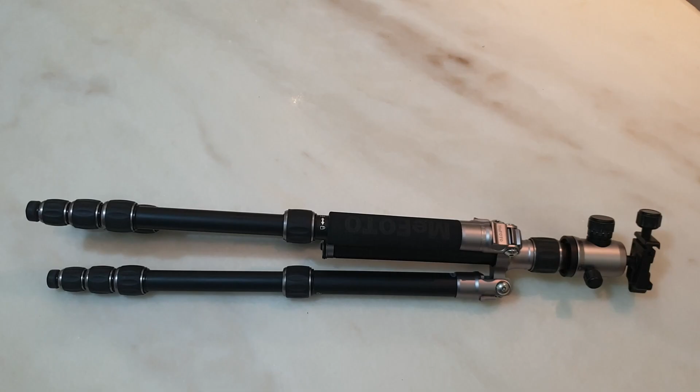So this is my tripod. And last time I'm using this like this to shoot all my overhead videos. As you can see, there's so many disadvantages of this. There's so many shadows appearing and it takes too much space on the table. And today we'll be addressing those issues by making an overhead video tripod attachment.

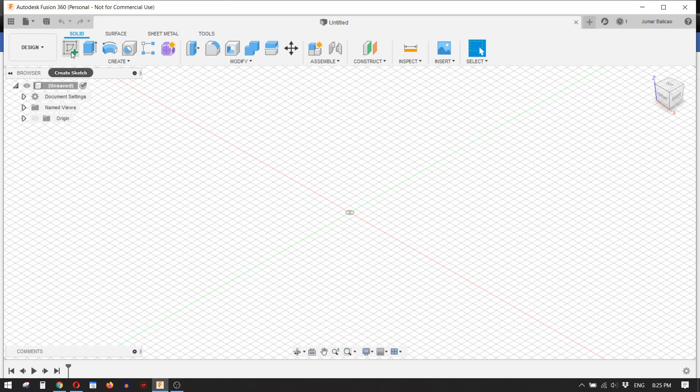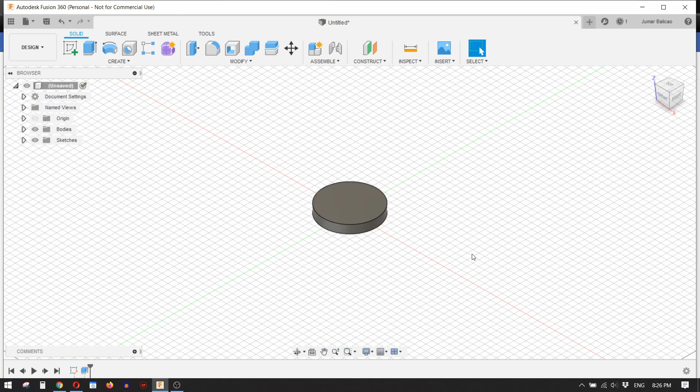So let's open Fusion 360 and we'll sketch a circle that is 45mm in diameter, and we need to extrude this to 7mm. Then we need to sketch again on top another circle that is about 40mm. Then we need to extrude this at about 50mm.

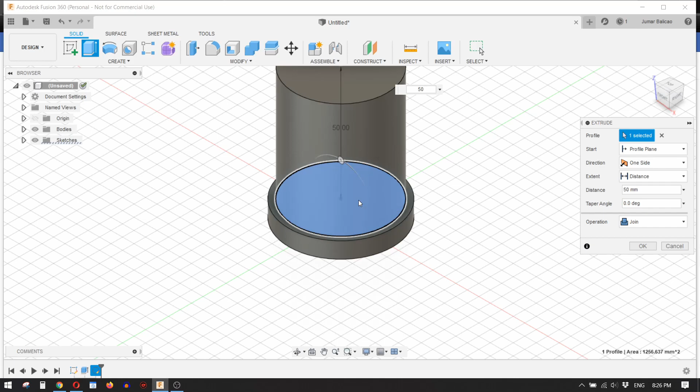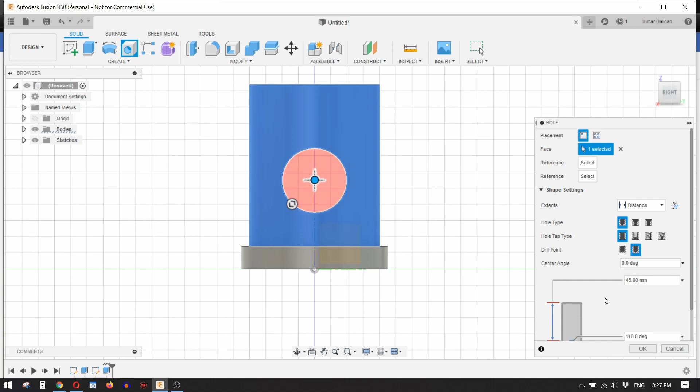So this is our base model, and we need to make a hole at the center. This is for the 25mm pipe to go in. Then we need to center this a bit, just making sure everything is okay, and then we change the diameter to 25mm, same diameter as the pipe that we'll be using. Then click OK.

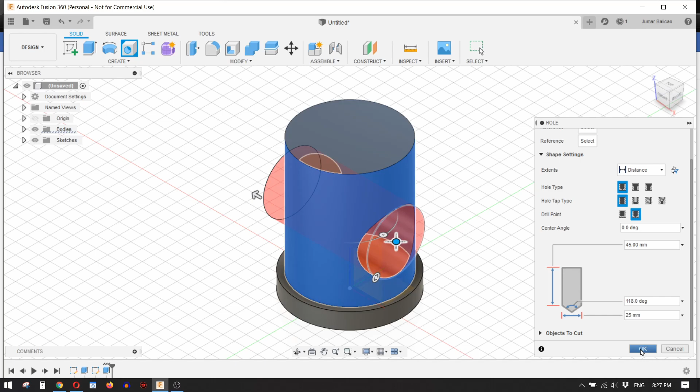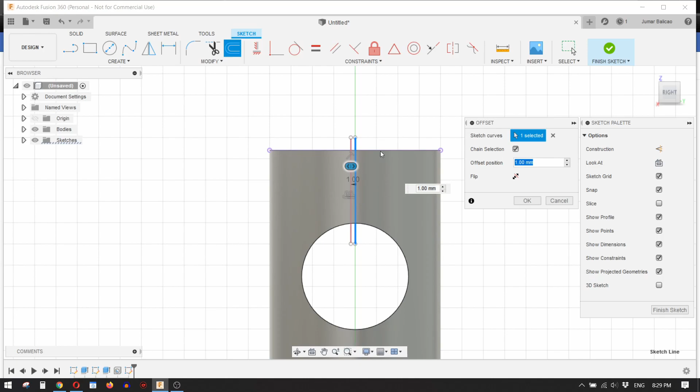Then the next thing that we need to do is to make a gap at the center so that we can tighten the pipe later on. So we sketch a line here and then we offset this to 1mm. And then we need to offset that one again by -1mm. Then we need to make a rectangle on top of that. Then we need to finish sketch.

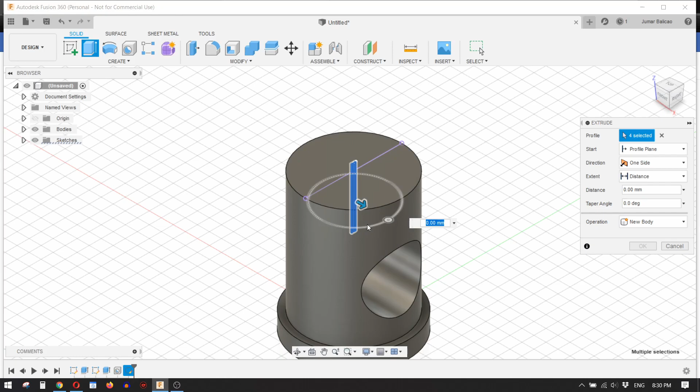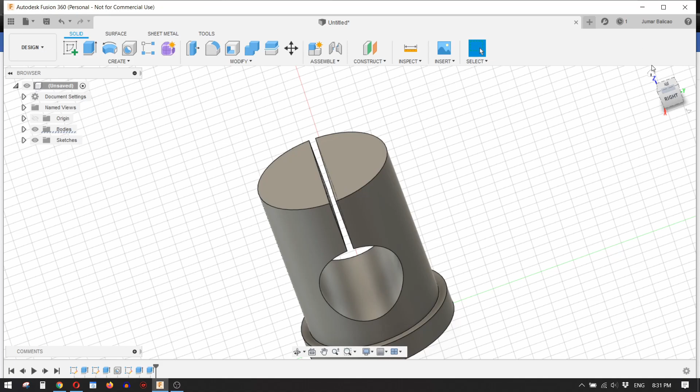Then we need to extrude this for us to subtract some, and this is okay. Then we need to extrude out this one again so the gap will be through the model. Okay, the gap is finished.

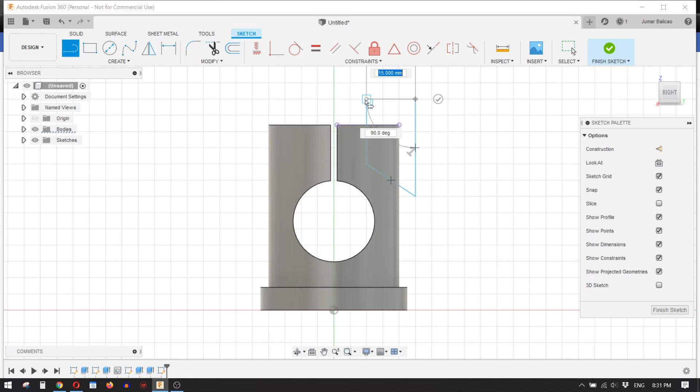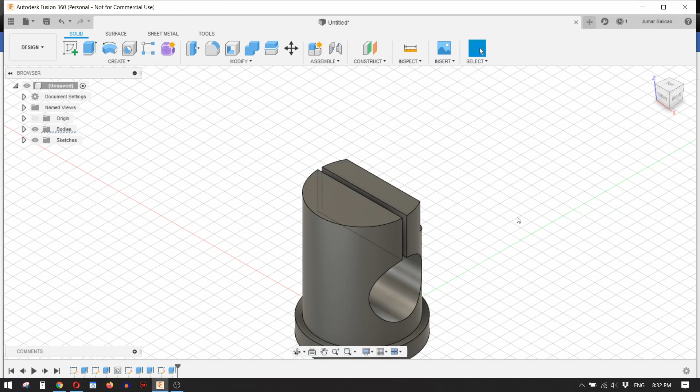The next thing that we need to do is to subtract some of the edges so that we can minimize printing materials. So I just sketch a trapezoid. No, that's not a trapezoid. That's just anything. I don't know what it's called. Then from the sketch, we need to extrude that to subtract to our model. Then we need to do that one again on the left side.

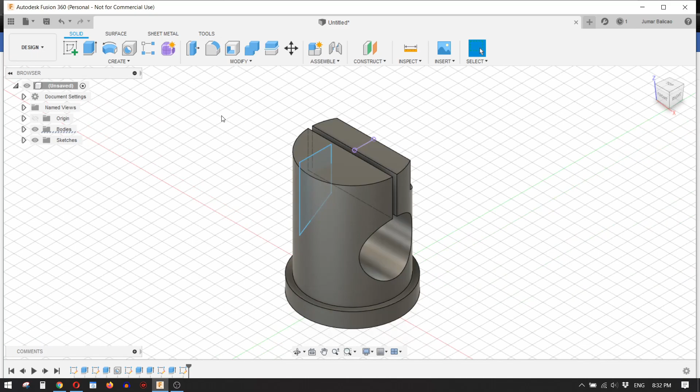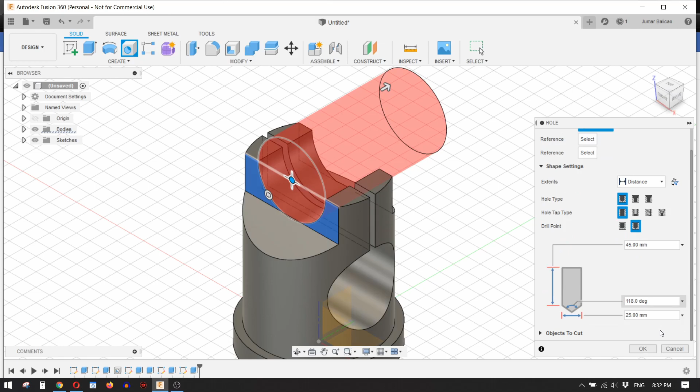And then from here we need to put a hole on the top. This is used to put the M5 25mm bolt later on to tighten the 25mm pipe. Just we need to center that a bit, and that's finished.

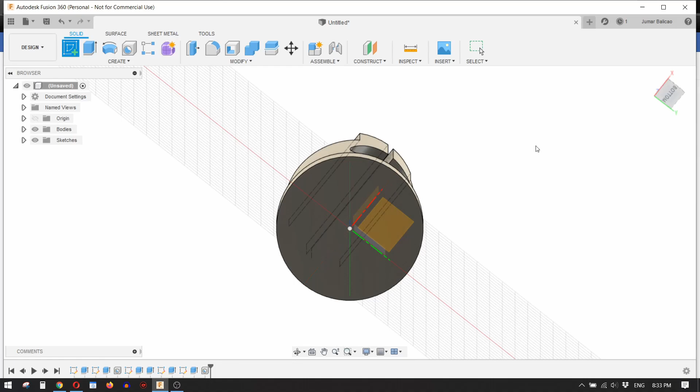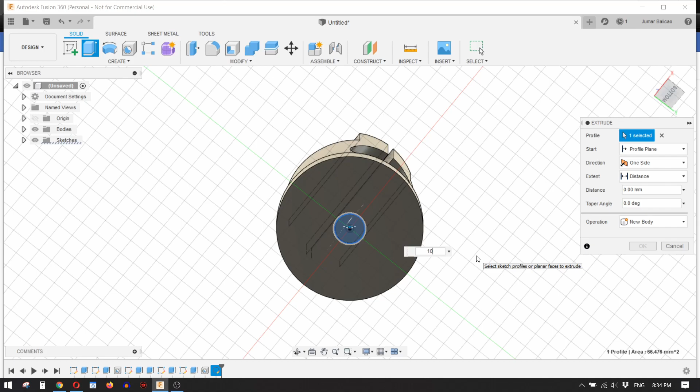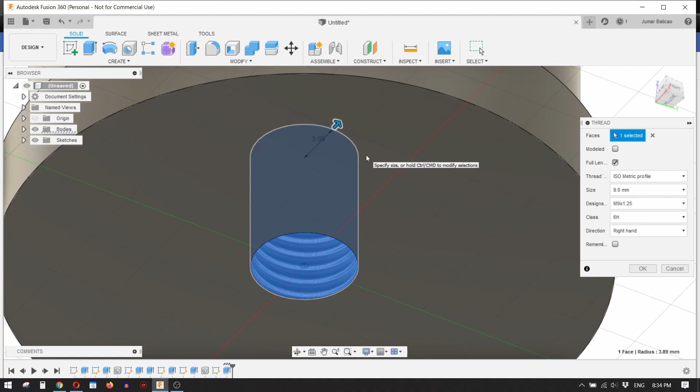And the last thing that we need to do is to make a threaded hole at the bottom of it. This is to attach on the tripod. This circle will be around 9.2mm. Then we need to extrude in that circle about 10mm. Then we need to put a thread on it. I think that this is okay. Just to check some of the things, click OK, and then the first attachment is finished.

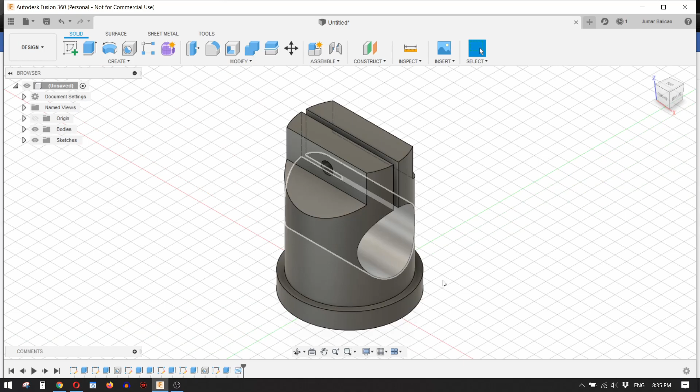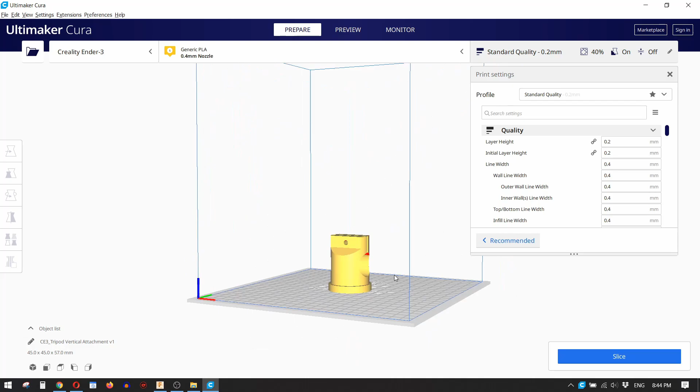And we just need to save this into our project files, and then later on we need to export this into an STL file. Then we just need to wait. Once it's done, we need to open this in Cura. So here is our model, and I need to do some adjustments on Cura first before I can save this. Then save this to my flash drive, and let's print this.

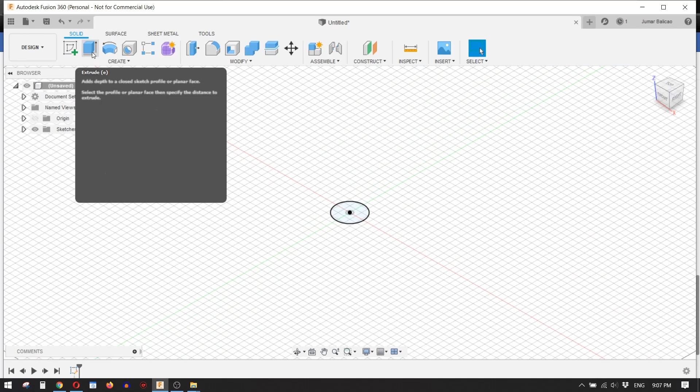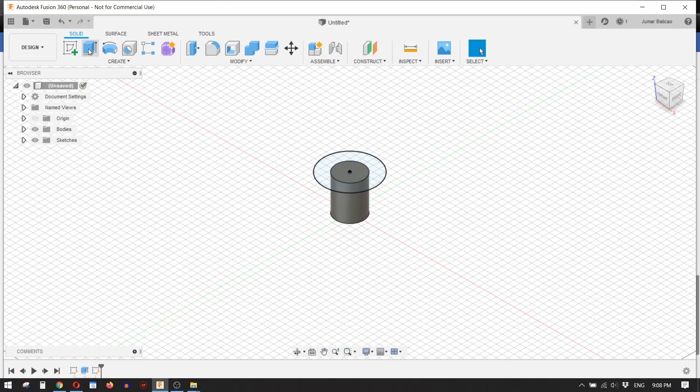And the next thing we need to do in Fusion is to do the attachment for the 25mm pipe. So we need to sketch a circle that is 23.3mm in diameter, and then we need to extrude this at about 30mm, and then on top of that we need to sketch another circle that is 43.8mm. Then the next thing we need to do is to extrude this into 7mm, both of the circles.

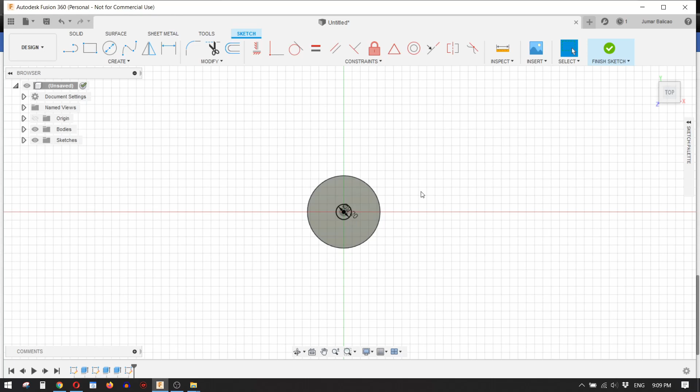Then of course we need to make a screw on top of that. That is 9.2mm, and extrude this to about 8mm. This will be the screw that will be attached to the tripod head, and we need to create a thread for that.

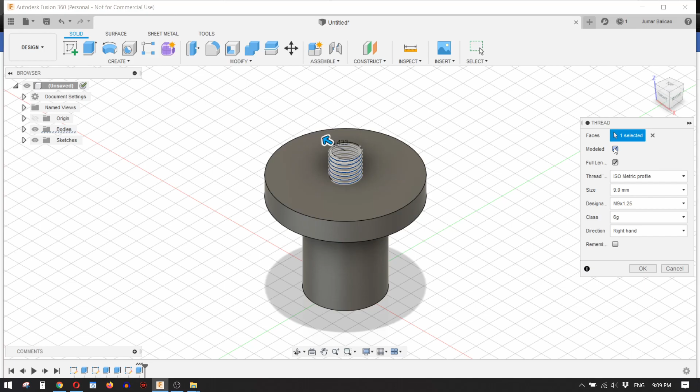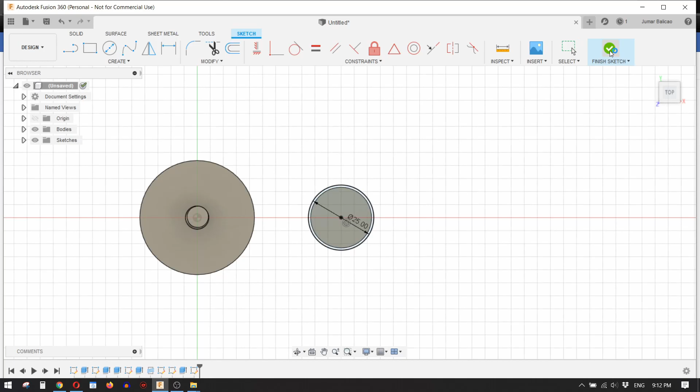And this is the pipe attachment to the tripod head, and we need to make another model again that will be at the end of the pipe. So we sketch a 23.3mm diameter circle, and then we need to extrude this another one to 30mm, and then on top of that cylinder we'll be sketching at around 25mm. Of course we need to extrude this again to 7mm.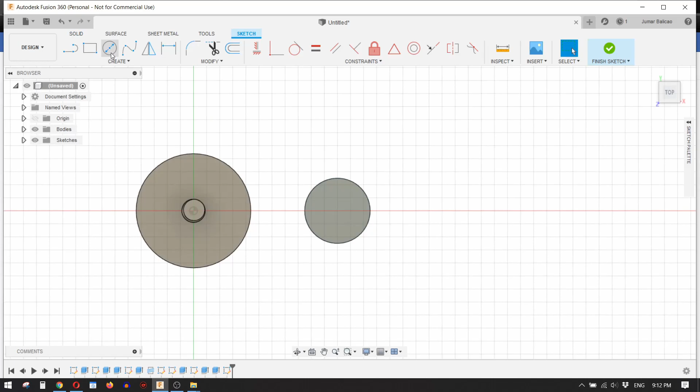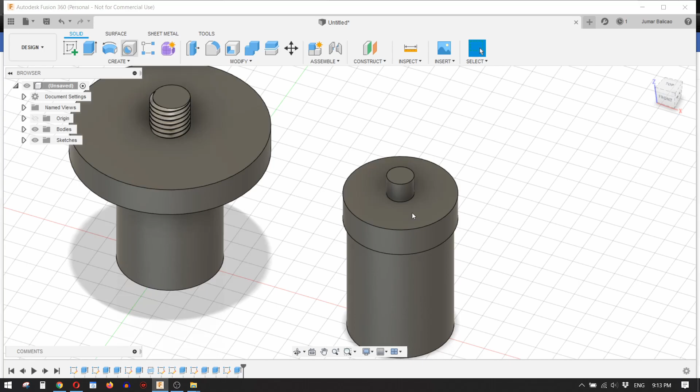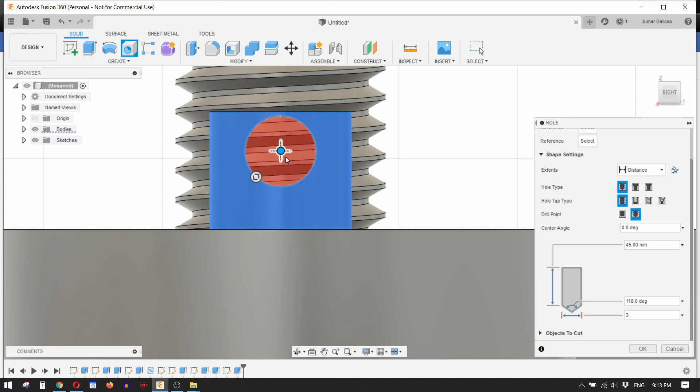And then at the end of it we need to do another circle that is 5mm in diameter, or 6mm in diameter, and then extrude this at about 5mm. Then we need to put a hole on this, because this will be used to hook something when you're using a DSLR camera, especially when it's too heavy for the tripod to carry. So we just need to center that a bit, and if everything's okay, that's okay.

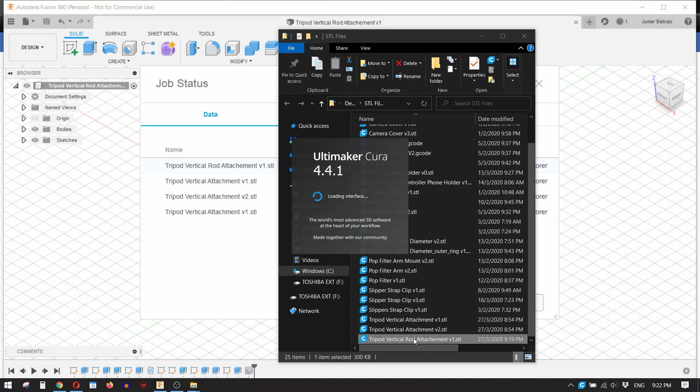And this is the finished attachment. This is for the pipe attachment, and then we need to just save this, and again we need to export this into an STL file. And then after that we open this in Cura, make some adjustments, and then print this again.

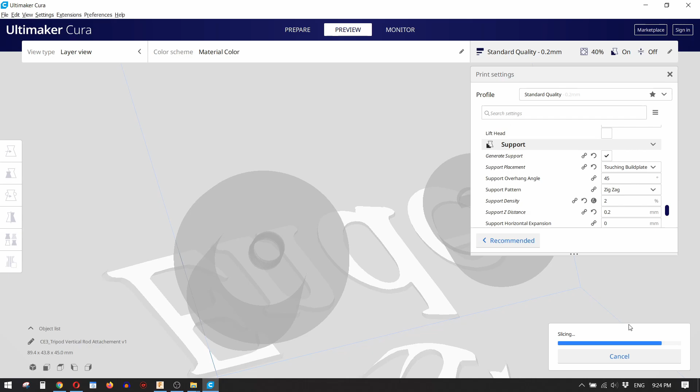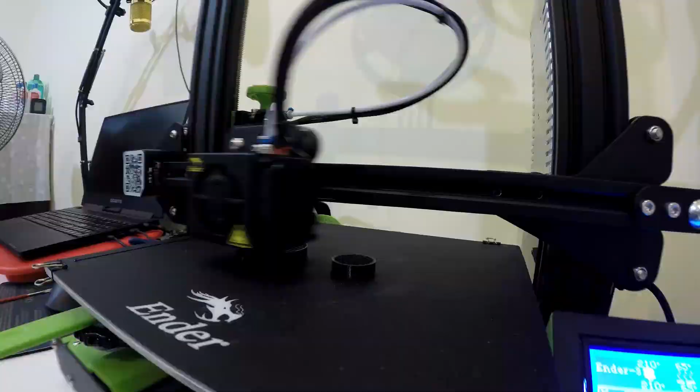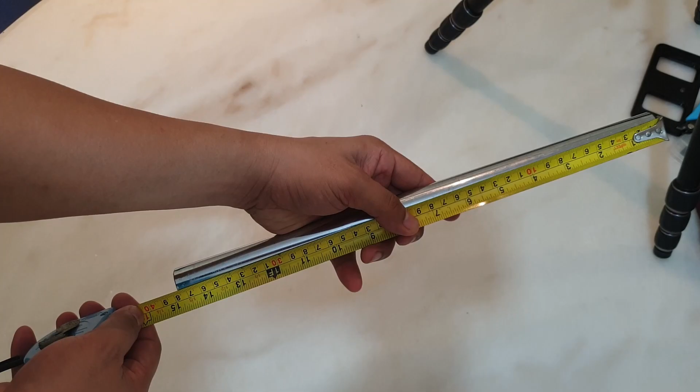The printing is finished, and these are the things that we need for this project. First one is a 25mm stainless steel pipe that is 375mm long. The second one will be the printed knob with M5 nut inside.

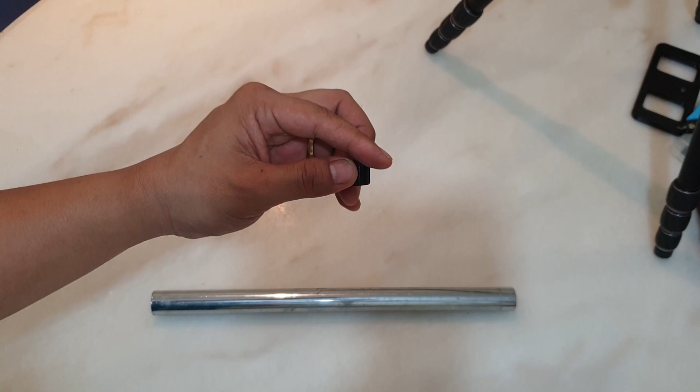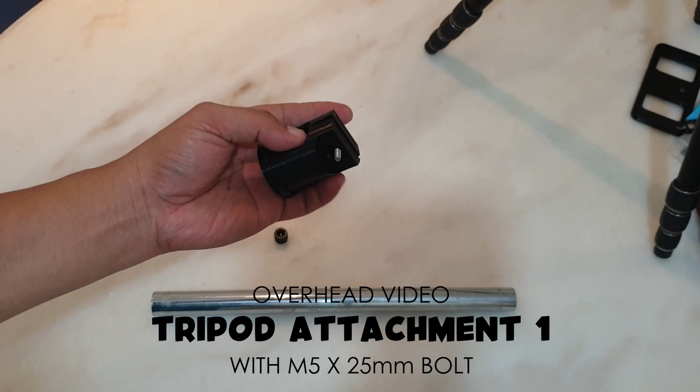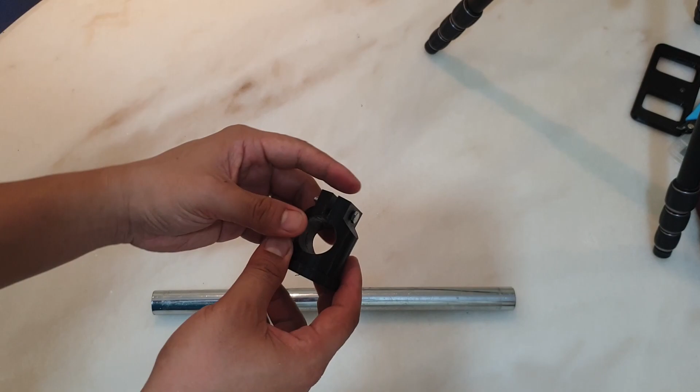Next will be the overhead video tripod attachment with M5 by 25mm bolt attached to it. And of course there's this threaded hole that is 9.2mm in size that will be attached later on a tripod. The next item will be the tripod head attachment to the pipe. This will be attached at the end of the pipe for the tripod head.

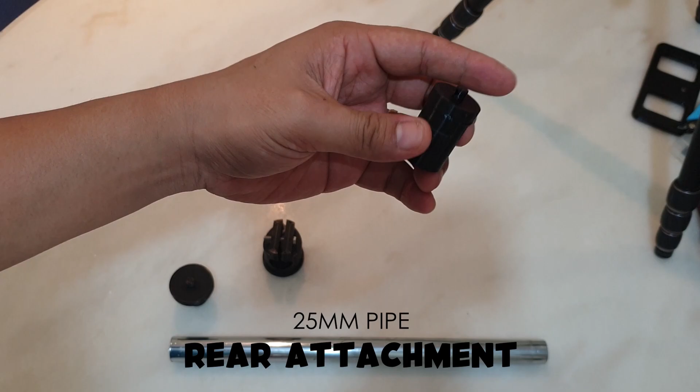Next is the 25mm pipe rear attachment. This will be attached at the end part of this pipe, so you can see, there will be a hole there where you can put a rope or a hook for you to use when the DSLR is heavy.

So now it comes to this part where you will see how I will assemble this project. First we need to take out this tripod head. Then of course we put the first attachment, and then after that we need to put the bolt with the knob.

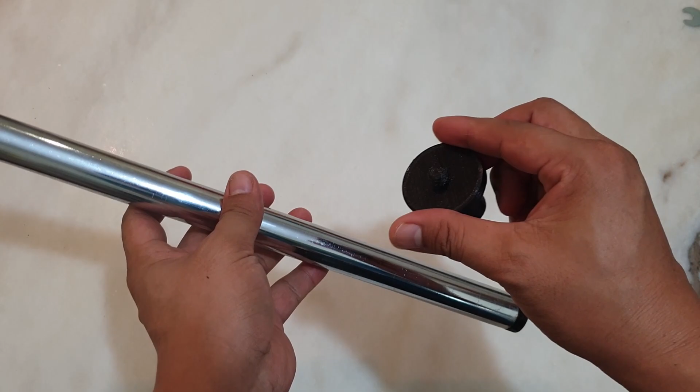And then we need to assemble the pipe assembly. We need to put the rear attachment first. This will be quite tight, so you need to push it a little bit harder. And the top attachment for the tripod head.

The assembly is finished, and we need to attach this onto our tripod, as you can see here. Then we need to attach also the tripod head, and all that's left to do is to attach your DSLR at the end of it.

But when you attach the DSLR, the tripod will fall down as it is not balanced. As I don't have a counterweight for this at the moment, I'll just balance this at the center. But if you want to extend this more, you can put a counterweight at the bottom of the tripod, or you put a rope and a hook at the end of the pipe.

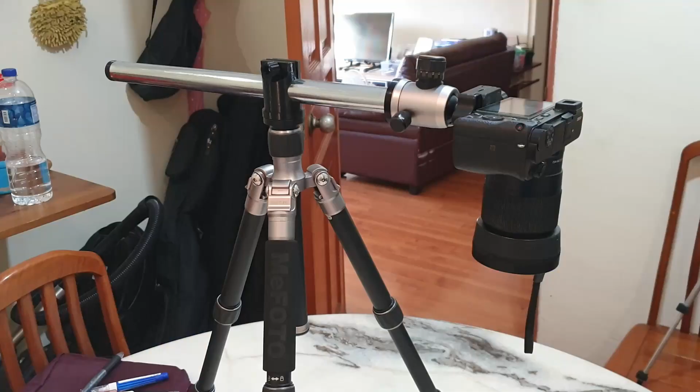So now this is the finished project, and I will be using this for most of my overhead videos in presenting all the designs that I will be making in the future on my YouTube channel, and I hope you like it.